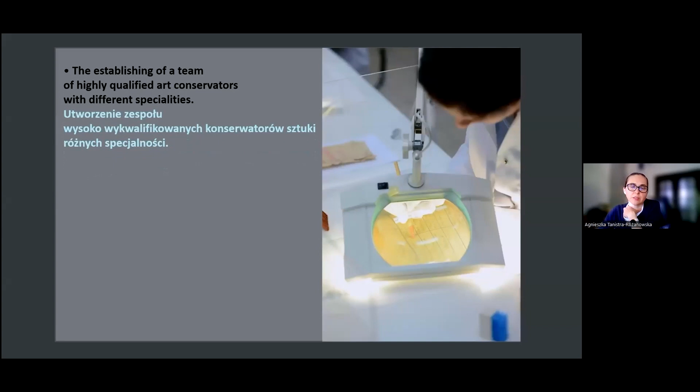In 2003, as has been said, the museum had new professional conservation studios. Setting them up made it possible to gather a team of highly qualified art conservators of various fields of expertise who could define the extant threats to the museum elements, discuss the factors that impacted their degradation, and set the objectives for conservation. They also developed standards for all conservation processes and for the documentation that the museum later developed, also thanks to this master plan.

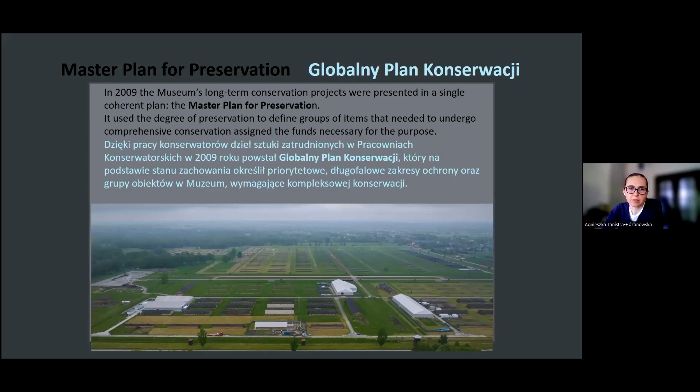That's how we arrive at 2009, when all those activities allowed eliciting the systematic plan of work based on the condition or degree of survival, defined the priorities and long-term protection scope, and defined the groups of objects that call for multifaceted conservation. These include both movable and immovable assets.

Another factor that makes this stand out is the financing of the museum. The creation and definition of the objects, its problems, and the estimation of needs made us capable of applying for funds for its completion. There is an endowment fund for our conservation works and for description of everything we have here.

This work is financed from the interest paid from that capital. That interest and the management of the endowment fund is the work of the Auschwitz-Birkenau Foundation. The museum has the comfort to do planning and carry out those works with a long-term perspective of 25 to 30 years, financed from Auschwitz-Birkenau precisely to carry out the museum's plans.

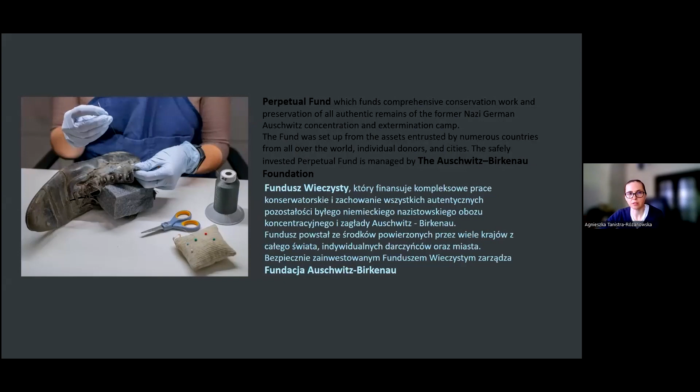As has been said, the museum spends over 30 million zloty a year to protect that. The money from the interest from the endowment fund exceeds 20 million zloty a year. That comes every year according to the needs defined by the museum. That's what financing looks like.

Now, what does this plan concern? It actually concerns most of the objects that are protected by the museum. We preserve archaeological objects, archives, museum objects. We modernize the way they are preserved. We conserve wooden and masonry barracks. We try to improve the water conditions in part of the camp, mostly Birkenau. We protect historical greens, ruins of the crematoria and gas chambers, and we protect section BI.

We do prevention, so preventive protection of this section before we enter complex conservation works. It's important that all our work is project work. We define our goals, the objects that we want to undergo long-term conservation, we define some time perspective, and then we start a project that we focus on as a whole. So complexity of all the works, very carefully planned, and particular meticulousness is characteristic of what we do.

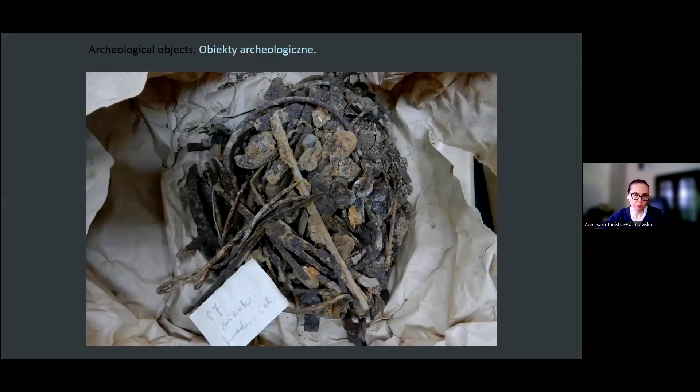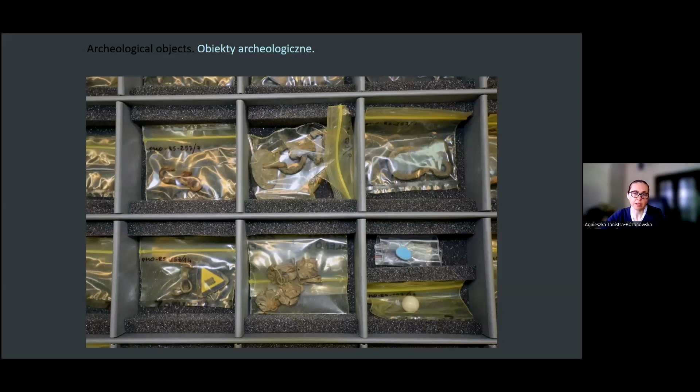Now, the scopes of individual works. Conservation also extends to archaeological sites, objects from archaeological research, and to the works that accompany our works in the ground. We can see that those objects are now stored differently. We adjust our conservation activity to each of them.

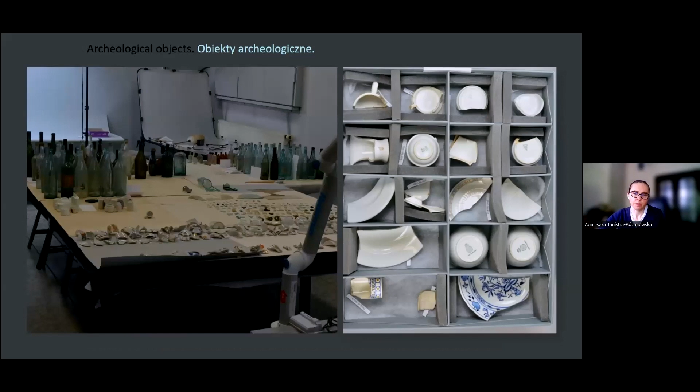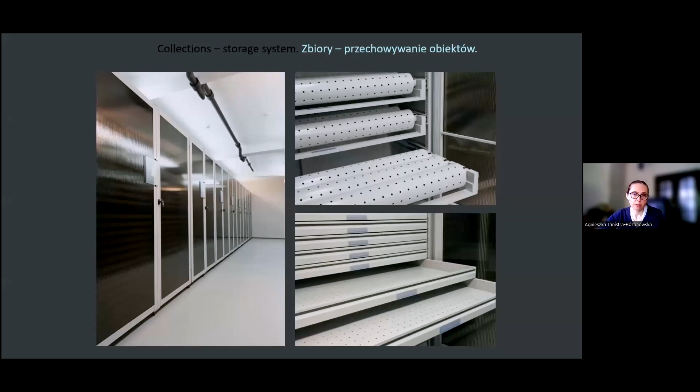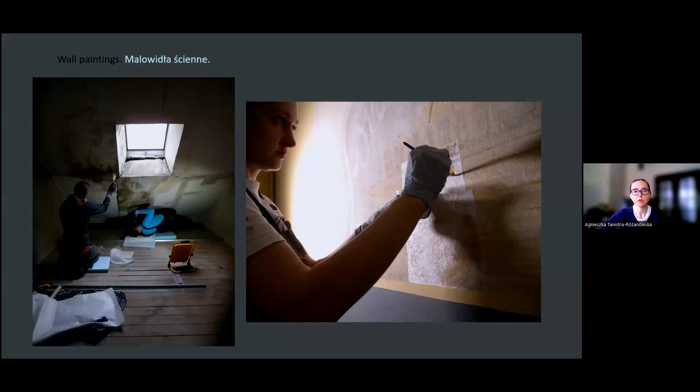We also conserve wall paintings as well as the historic greens, which will be covered in detail in one of the following presentations in the panel.

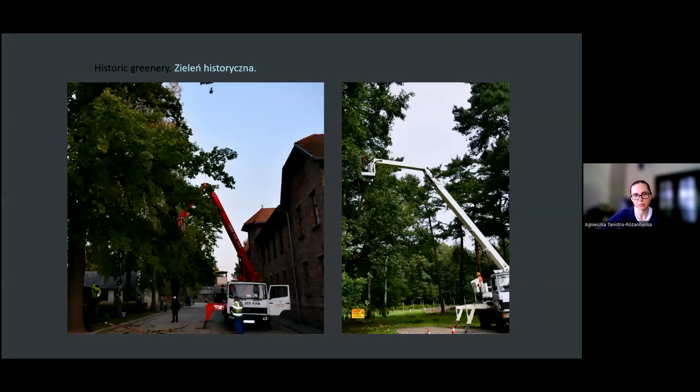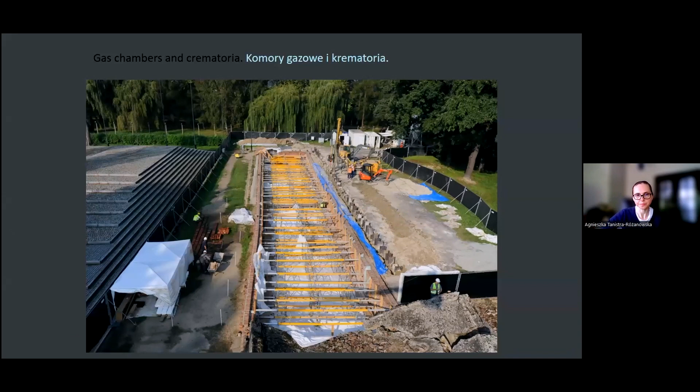Complex works on wooden barracks involve all the parts, including even flue ducts in the chimneys. The complexity here is high. All the elements undergo conservation, but also construction works. We show you the gas chambers, the crematoria - here those scopes were absolutely interpenetrating.

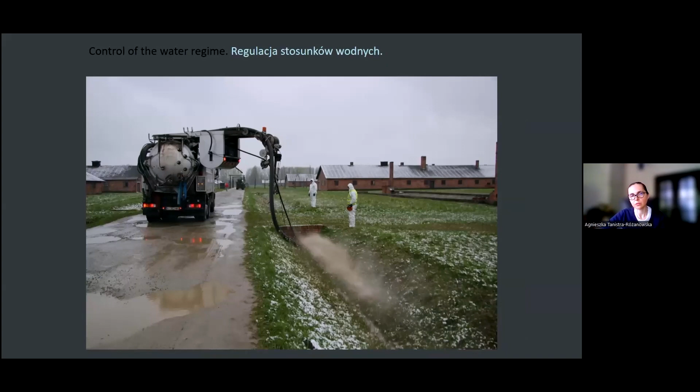An important aspect of this global plan is regulation of water tables. We renovate those ditches and the historical culverts. We show how we make inventories of those historical culverts, and we try to be as non-invasive as possible.

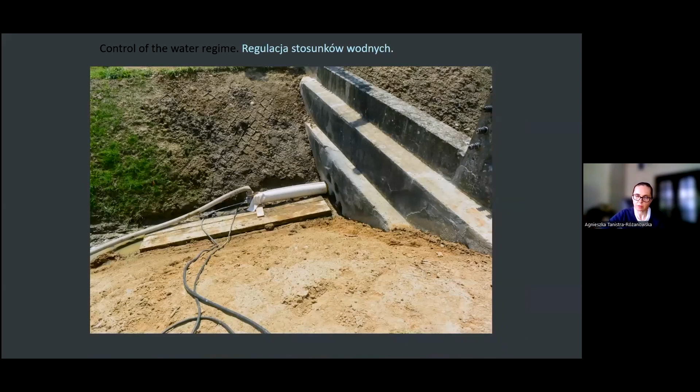These are the results of those works that made it possible for us to see that some of those ditches had stone bottoms, and those elements had by now been missing.

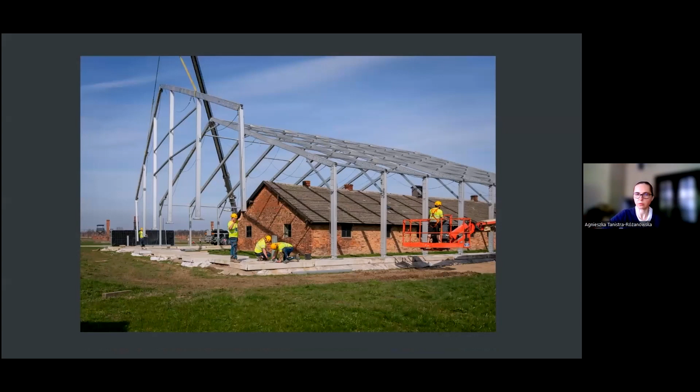A very large scope in carrying out this plan is the successive retention of the masonry barracks in Brzezinka. That's another thing that makes our work stand out. We conduct renovation throughout the year, throughout the lifetime of a given project, which on average runs from 2.5 to 4 years, depending on how we carry out works. They can be commissioned to external partners.

Now we have those halls, they let us carry out work, and that's one of the characteristic elements of stable financing of this plan.

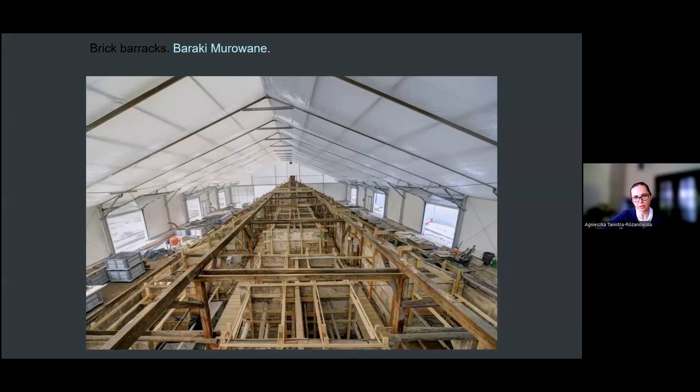You can see how complex these works are, both in the residential barracks and also in the kitchens, where these undergo conservation outside this unit.

What is another distinctive factor? Yes, we run works under the tents, and that's become a particular standard of our work.

Well, we are financially independent to a degree at least, and we can run these works continuously. We also have our own team, highly interdisciplinary. You can see archaeologists accompanying all our earthworks at the stage of planning, also planning all the renovation.

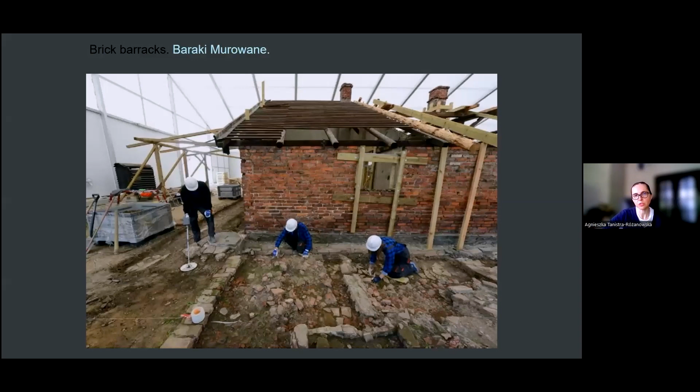You can sometimes find relics, sometimes immovable, as in the previous photo, sometimes movable, and we conserve those as well.

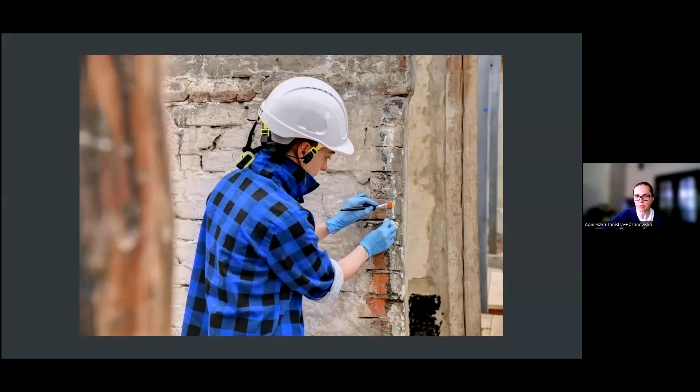In our team, we have craftsmen working at the museum who are a part of the team working here, also conservation experts for the works of art, working on all the elements of the barracks and so forth.

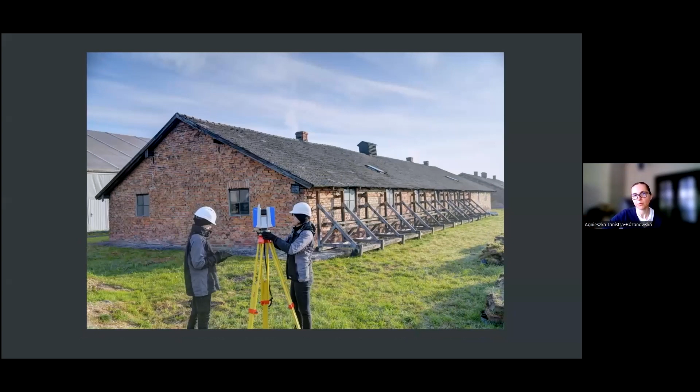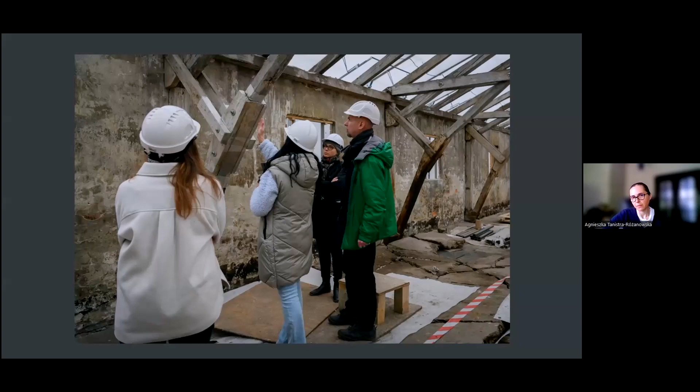We have a large team documenting our work. Here you can see our colleagues who do laser scanning, and extremely important is the fact that we have engineers, technicians, also art conservators, and they plan all the preparations and together make decisions concerning how to manage specific problems and how we're going to cope with those.

What is important here, all our works are very carefully documented and reported at all stages, which distinguishes our actions, because we use all the contemporary available methods, and we want the teams that will come after to know more. But this will be discussed in detail during the next presentation by Mr. Będkowski and Mr. Tomasz Zemła. So thank you very much for listening to my presentation.

Good evening, ladies and gentlemen. My name is Tomasz Zemła, and I would like to discuss how Auschwitz-Birkenau Museum uses modern technologies for the protection and preservation of historical objects.

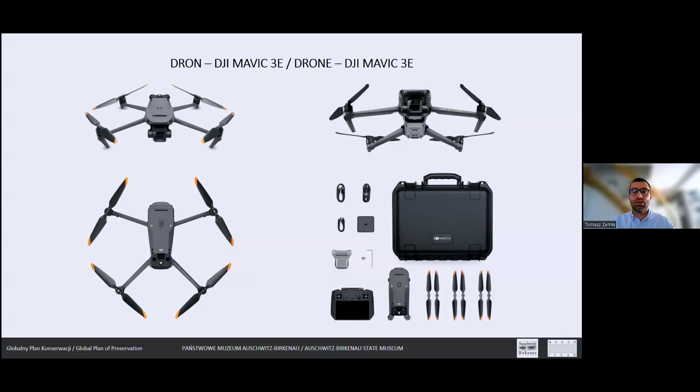In our everyday work, we use a lot of diverse devices. One of them is a drone, equipped with cameras, thanks to which we can document the condition of the area and the objects that we are looking after, because the photographs and films can be made at a specific time moment, and these photographs can be used for identifying changes which are present.

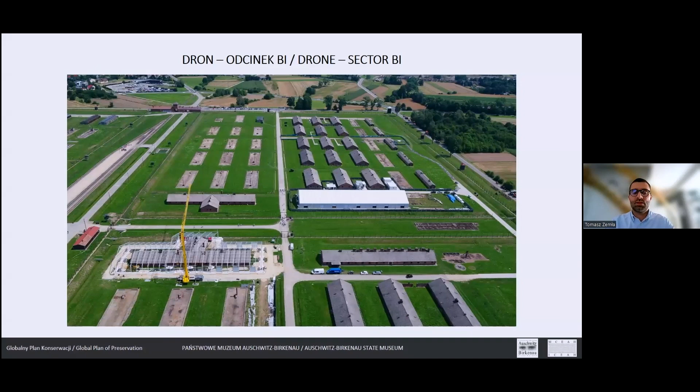With the use of drones, we also document the works that we perform. For example, we have documentation of the moment of erection of a tent hall with conservation works. Also, we can compare photographs. The photographs you saw previously were average photographs, while the ones now are orthophoto plans, metric photographs, and you can see the long shadows given by the objects.

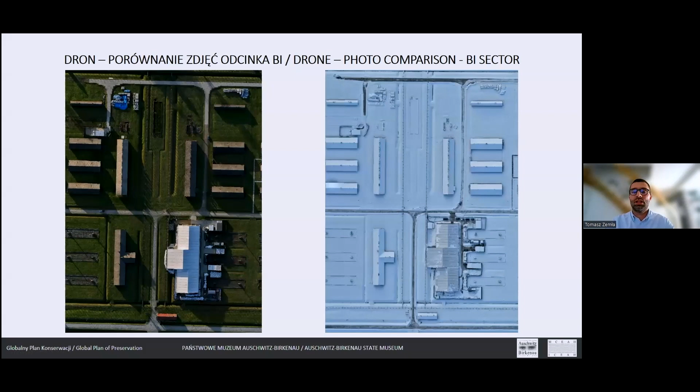We can document the area at a different point of time, for example here in winter, at noontime. We see a global approach with the program covering the entire area of Auschwitz-Birkenau, but this has some defect, because with such a grand area of 190 hectares, it is absolutely impossible to show the detail, as the photograph would occupy too much space and would render future use more difficult.

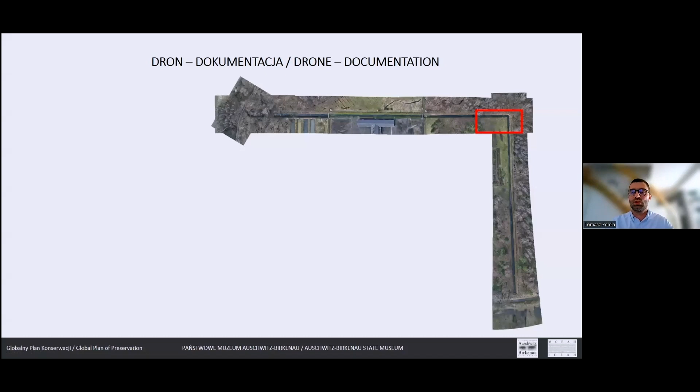As we can see, this is a ditch behind the sauna building, and we can give up this larger area which is of some interest for us at some point. If you do not need information for the entire ditch, but only its corner, you can document only some selected area. Thanks to that, you have access to smaller details.

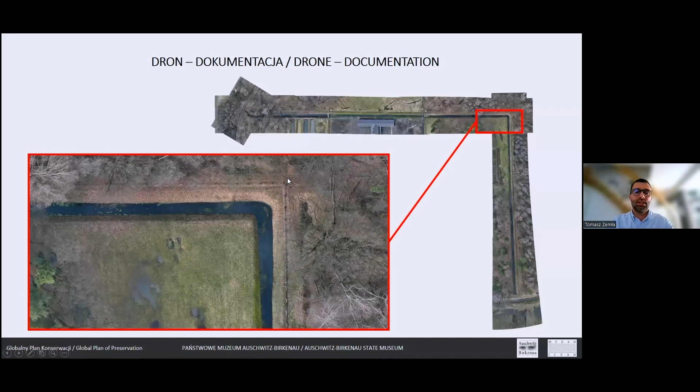Some other device that we are using is the laser scanner. The laser scanner is a small device, about 30 centimeters, which uses a laser beam and produces a photograph. It captures the vertical surface, whereas the drone is used in a horizontal one. That is why it can document the area.

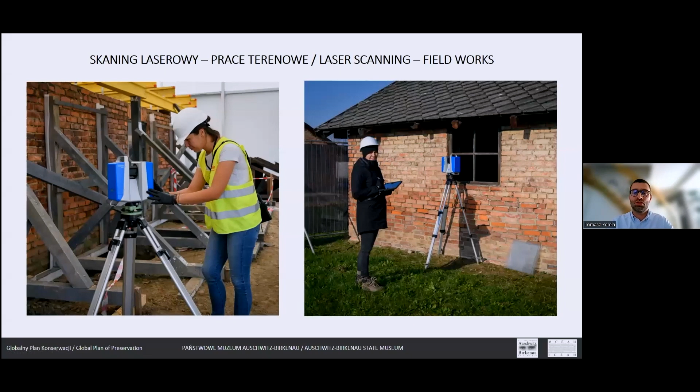So we place the scanner on a tripod and we can operate it manually, but we can also operate it remotely. There is a tablet here with an app servicing the scanner, and it can be started or stopped, and the progress of work can be monitored.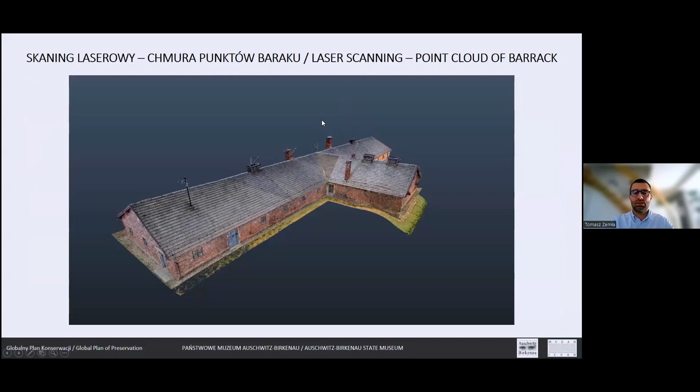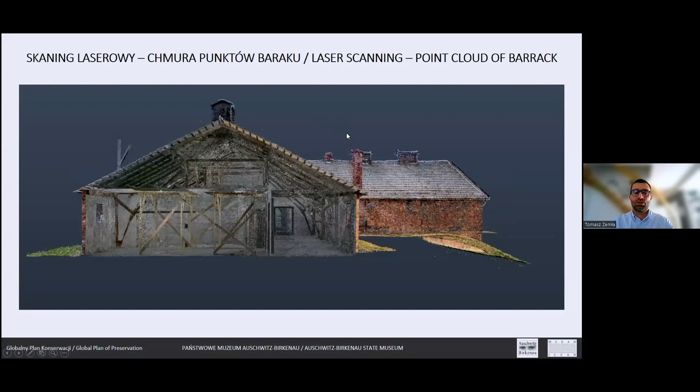The effect is a cloud of points. This point cloud contains millions of points reflecting the geometry of the scanned objects. And this is the vertical cross section, thanks to which you can have a look inside the building.

If a series of black and white photographs of the facade is performed, this can be compared to the real situation of the building.

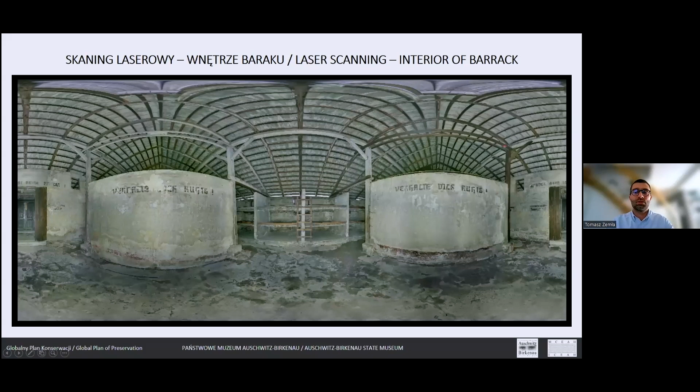This is the laser scanning, a 360 degree panorama. Once it is saved in a file, you can see the element of the roofing, and the entrance door to the barrack, also the closure door.

Another product from working with the point cloud is the strain map, where you can see strains, for example with the walls or floors of the buildings, which are most visible here in this drawing.

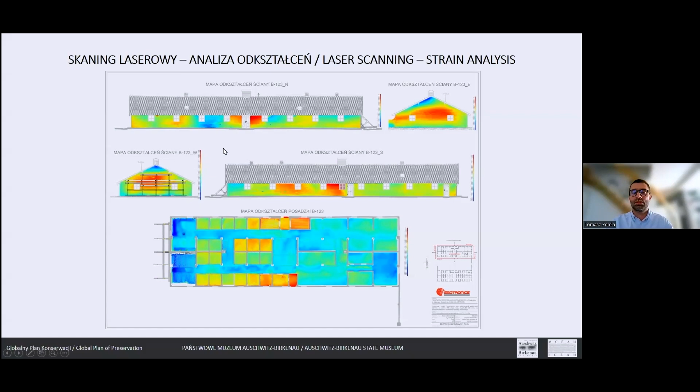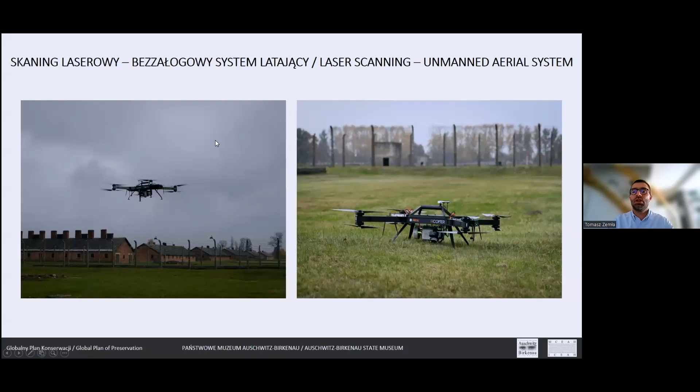This can be done with one device only: an unmanned aerial system consisting of a large drone with a laser scanner. We do not have such a device, but we used it for the documentation works in Auschwitz II camp.

This leads to a cloud of measurements, a point cloud, which can be classified for data interpretation within the point cloud, with markings of the objects and buildings.

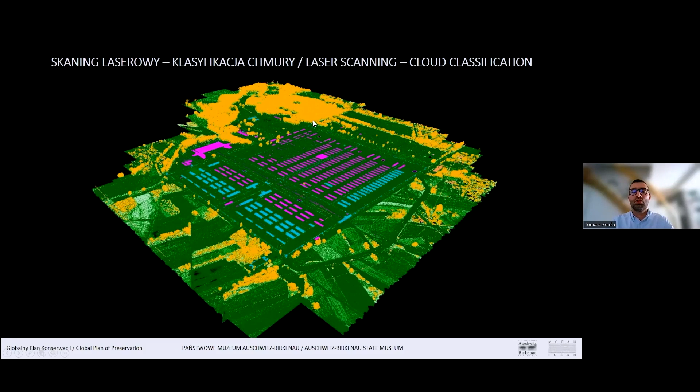In pink, you can see the ruins. Yellow is the forests, and green is other areas.

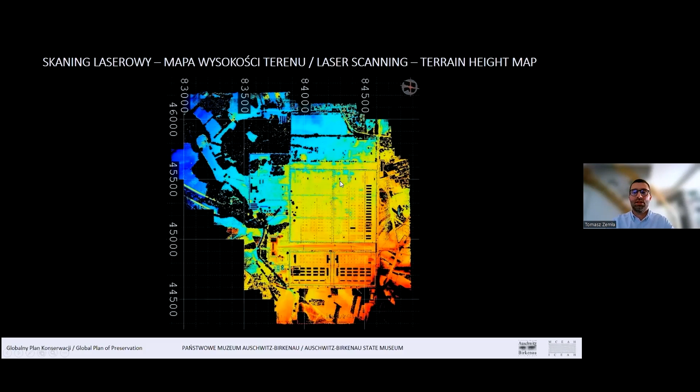We can also perform height analysis. This is the map of the height of the area, showing the lowest areas as well, in the northwestern direction.

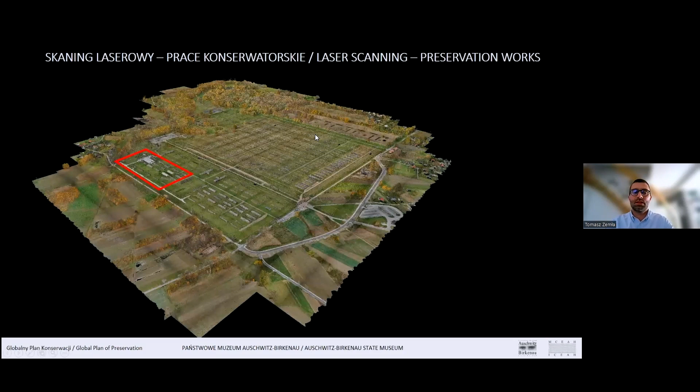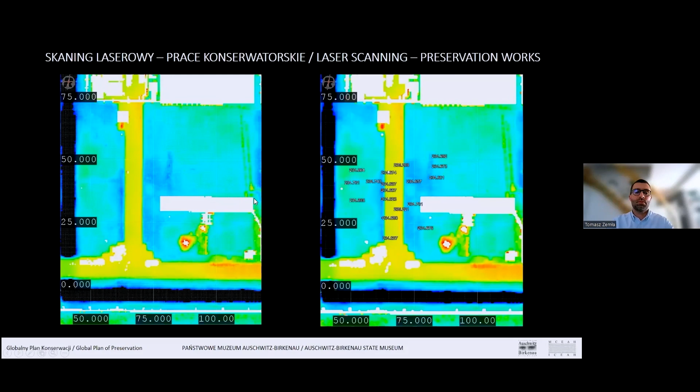We also use this for current conservation and intervention works. For example, we can see a small red narrow area, so we performed analysis to see where we can see the navy blue areas, and here the white rectangle is the barrack.

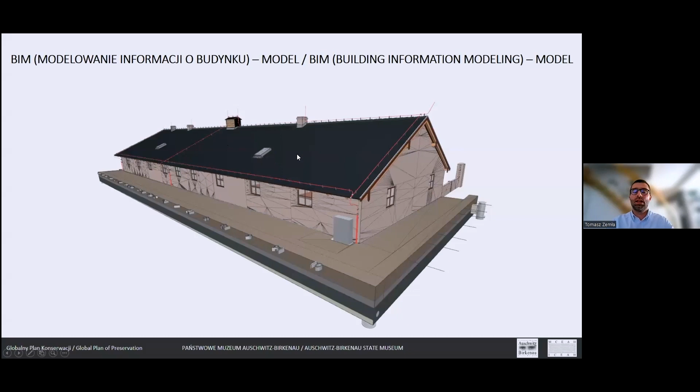Another technology is the BIM, the building information modeling, which employs the 3D model, but it has to be interconnected with other information concerning the entire building, because we are dealing with existing objects.

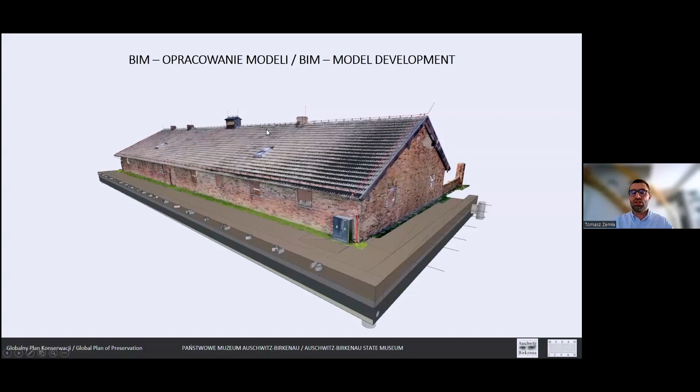We apply photogrammetric textures onto photo plans, which are done photogrammetrically, made on foundations, ceilings and floors. Here you see four types.

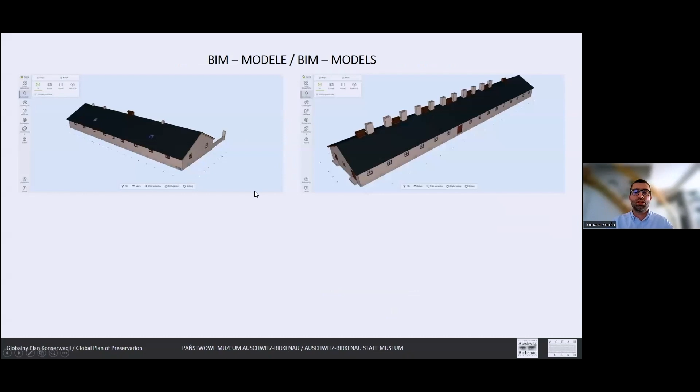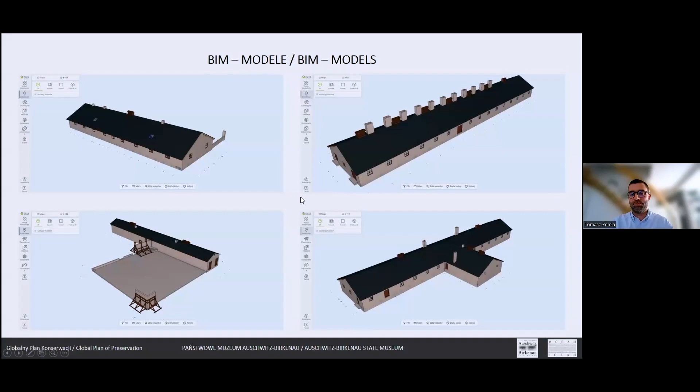For example, we have the model of the barrack, the ruins of the washing room. This can also be processed with a cross section at any place.

We are modeling with the accuracy up to 2 centimeters.

This is the model, and thanks to that we also have access to elements as they were after the conservation works were carried out, elements that have already been covered. This can also be done as post-production work.

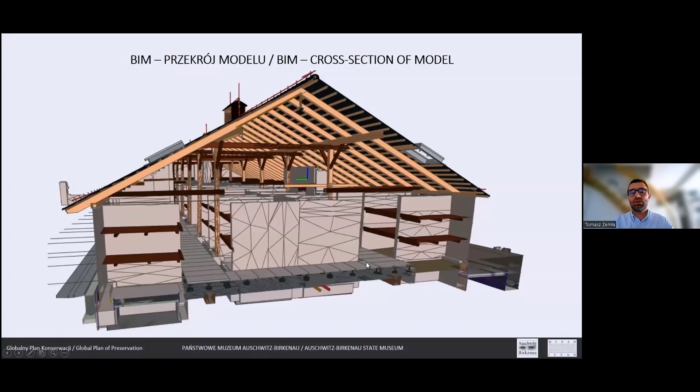So everything that is covered with the floors, thanks to this post-production model, we can get information about the covered elements, which can also be used for works planning.

This is the model of the barrack in the protection work. Please observe the historic floor.

When we use the model, we can visualize some works, so we can see the conservation works, and we can see that the supports disappeared because the wall was stabilized, made by some replacement wall, replacement floor, so that visitors can move in a safe way.

What is important is the information. All this deals with a specific element of the barrack - we also had the floor, the roof with specific information, and we can see what is important from the specific point of view.

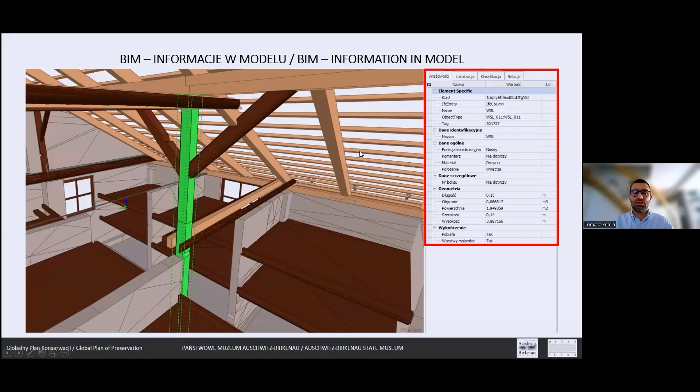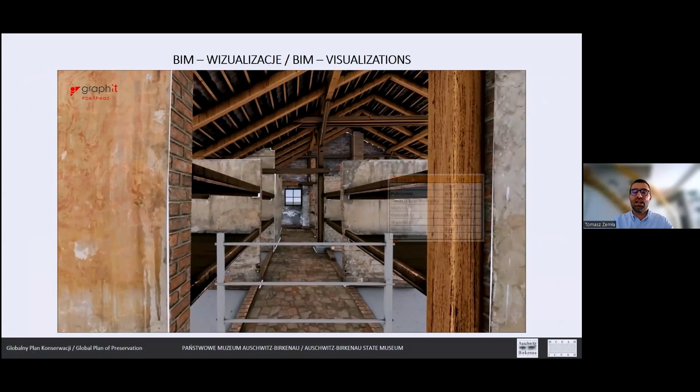We can also make visualization showing the condition of preservation and the post-conservation condition. But what is important here is not only the geometry or visualization, but also specific information concerning historic walls.

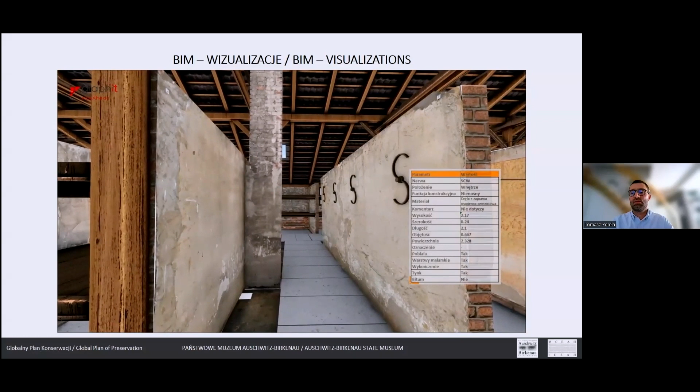An example of data integration is the integration of laser scanning and BIM - the point cloud with BIM models, for the B1 section, integrated with BIM models plus the visible elements. If you look closer, we can see the tent and a fragment of B1 section.

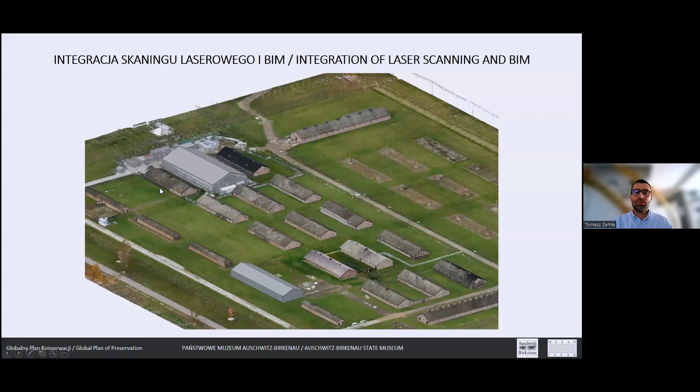So you can see the back of the building construction and also the containers, which helps us with the future works and with specific place and location. That is why

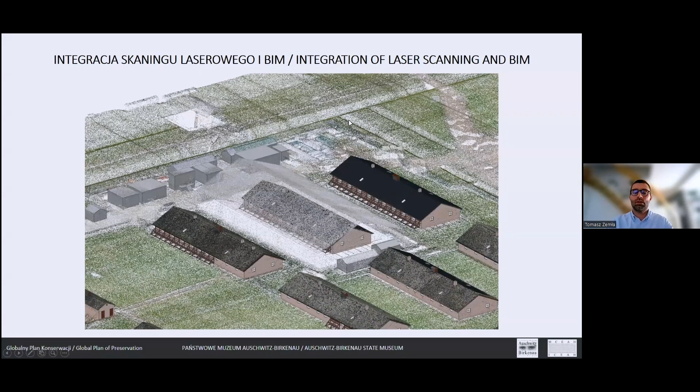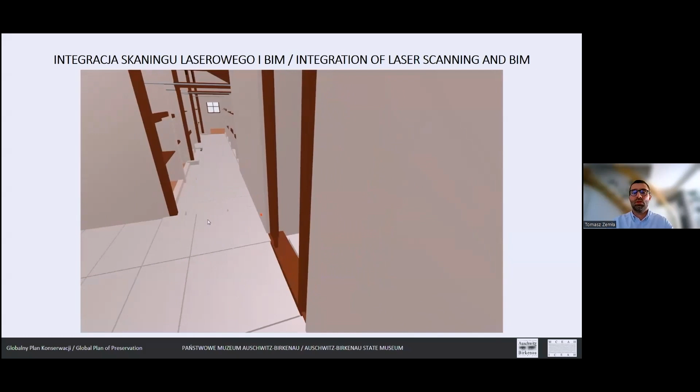I can find the model of a barrack, so we can move it, have a close-up until the view that we are interested in is made closer. If I remove the visibility of the door, I can also turn it and see what I'm interested in.

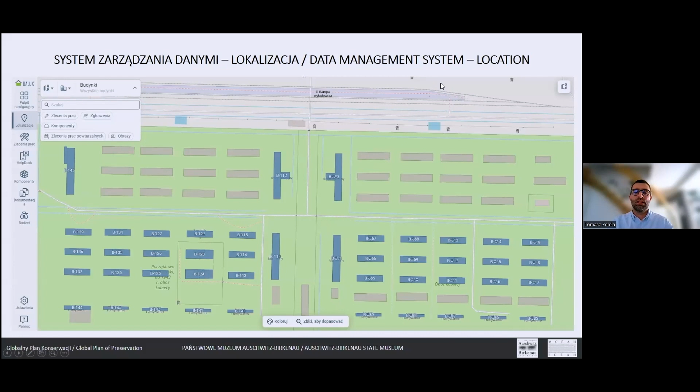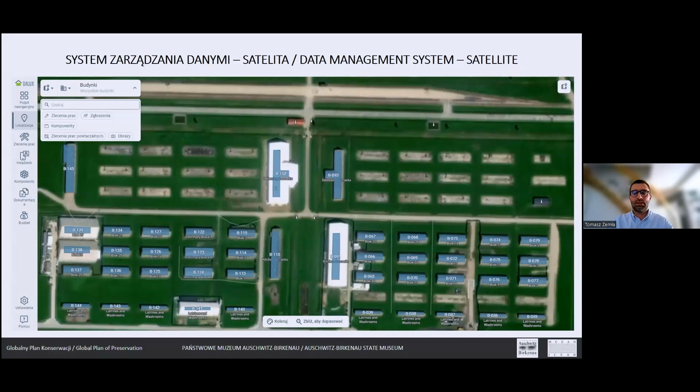An important thing for us is the management, that is why we are at the stage of the data management system. It is also a pilot project concerning the B1 section, because we have 45 brick barracks introduced there. What is important for the view is the map, but we can also change it, trying to see the objects we are interested in against the background of the satellite view.

And this is the filter with the object, so the barracks are filtered through their historic function, and additionally it can be added. So this is the largest group of the objects. For each of these 45 buildings, there is information.

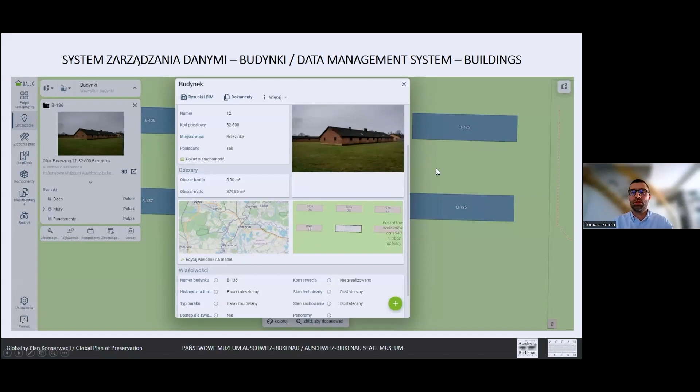So there is the point cloud, and this is the introduction of documents. For each object, we have the global location and also on the territory of B1. So, for example, the number of the building, its historic function, and whether a specific building is made available or not. So this is what the work with the system looks like.

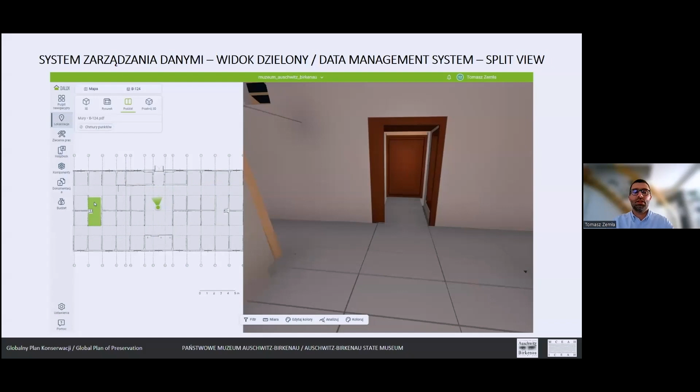And on the left-hand side, it is the projection which are compatible with one another. So if on the left-hand side we move on the specific building, it is automatized.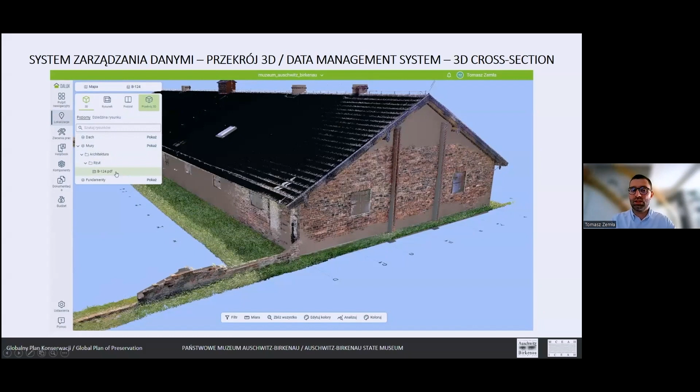Another example of data integration is the model, which shows us that we can see the three types of data integrated in one place. So we can rotate it in order to get information of the objects that we are interested in. So we can also have a look at the details so that we could see what it looks like.

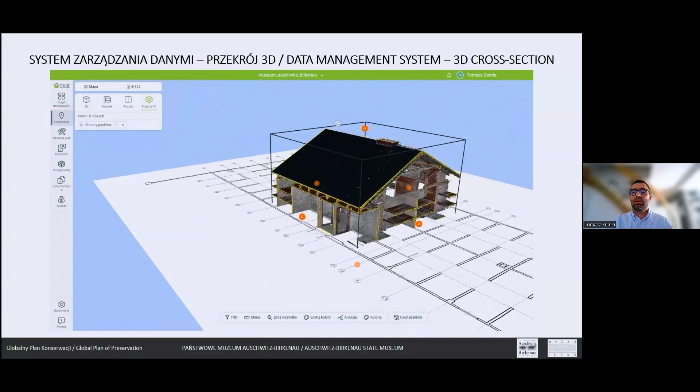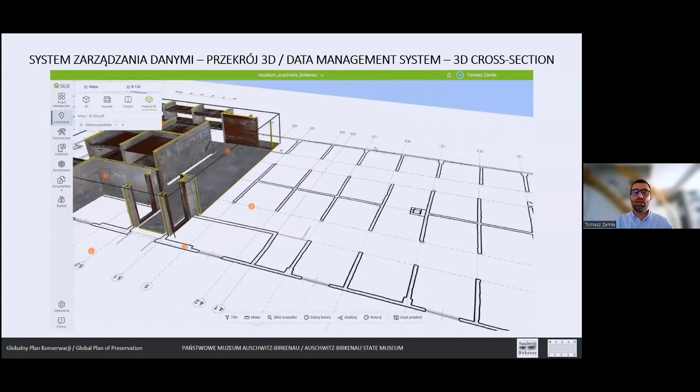Against the wall. And if we are interested, we can do it with a specific box that can be cut so that the elements of the barrack does not obscure the view. And thanks to that, we can see exactly in which place of a building we are located.

What is of utmost importance for us is the reflection of the elements of the barrack. So it was filtered after the components.

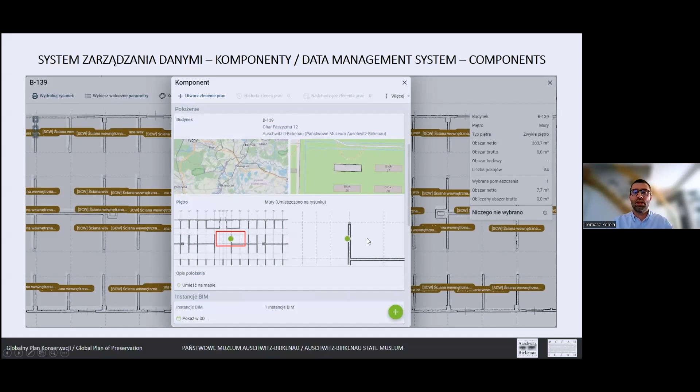So that is why it's located there, and it is a global approach from the general part to the specific part, and we can move the specific one that is of some interest for us, and for the specific pillar that is important for us.

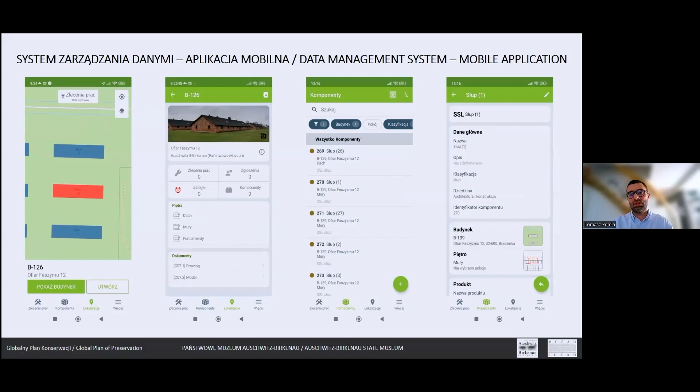And the last thing from the object that is used is the system of geographic information. So here we can see the objects, the buildings in the former Auschwitz camp, but here in the background we can see the orthophoto plan from

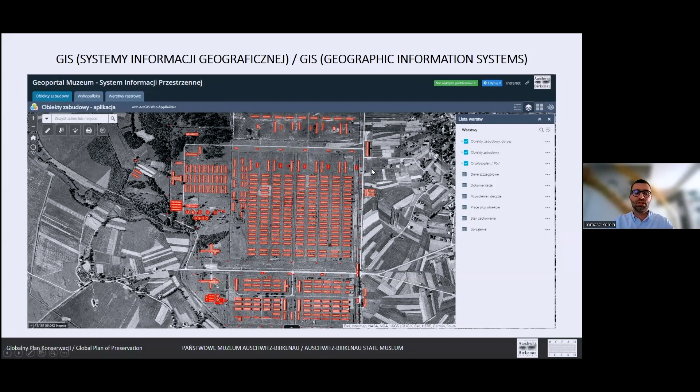1957. That is the aerial photograph, and we can see here the information concerning the barracks, the ruins, the camp ditches, and also culverts.

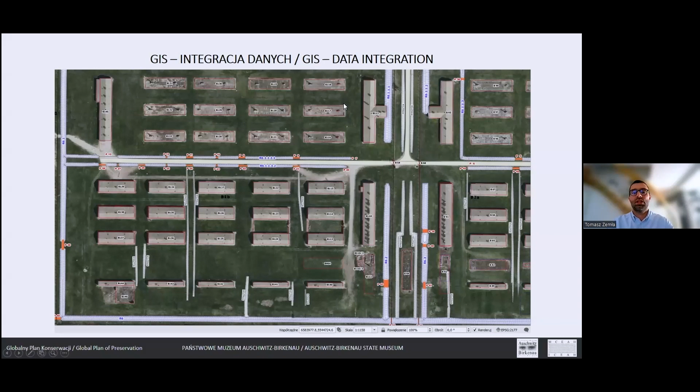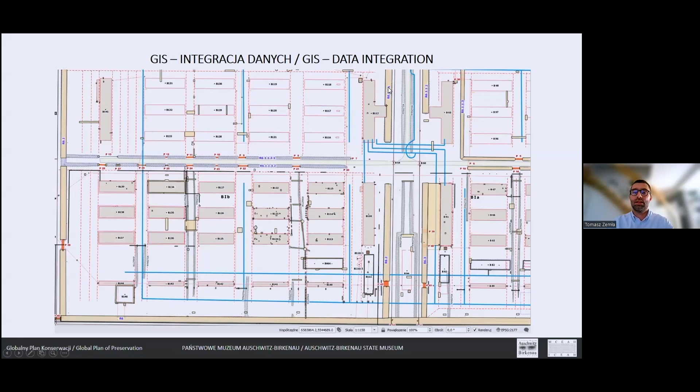And also there is the contemporary orthophoto plan, so there is nothing against the contemporary photograph being replaced with another one. So this data can be switched off, and the system can be saturated with the information concerning historic water lines, water pipes. There are also drainage systems which are marked with the dotted lines, and the yellow rectangles are the areas where we carried out our work.

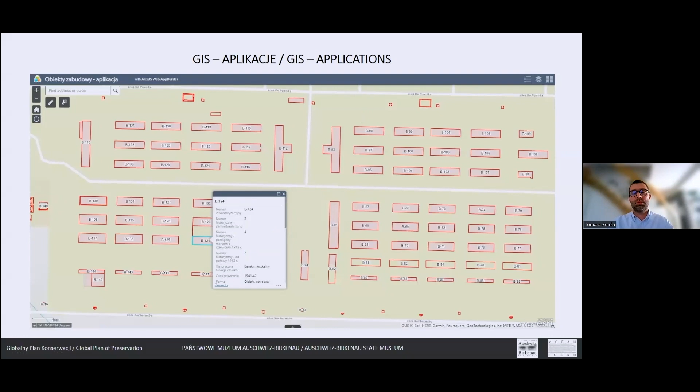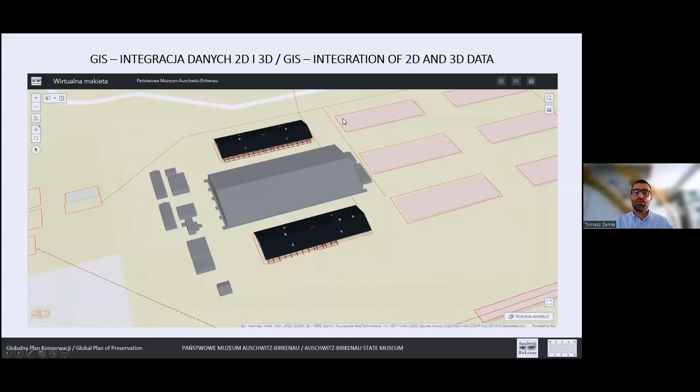So our staff is guaranteed simple access to the data. It can be obtained from the point of view of an internet browser, and it was 2D BIM data, a map, but also we can add some models to it.

We can also get to the details of a building, not only of buildings as such, but also its components. So, for example, there is a selected roof beam with information concerning this specifically selected beam. So all the digital technologies which we use are

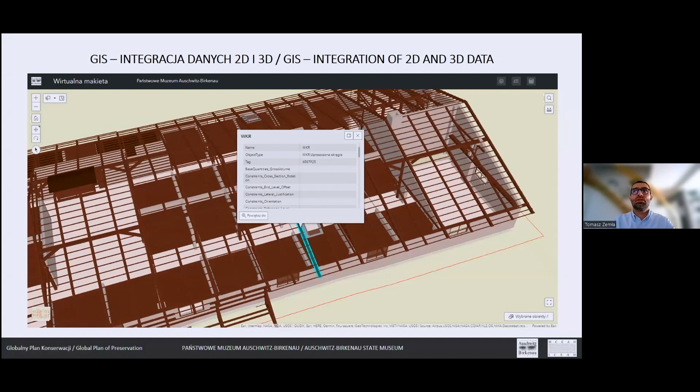their objective is to gather data, to collect data, and analyze them, so our decisions can be easier, and the buildings and objects can be protected.